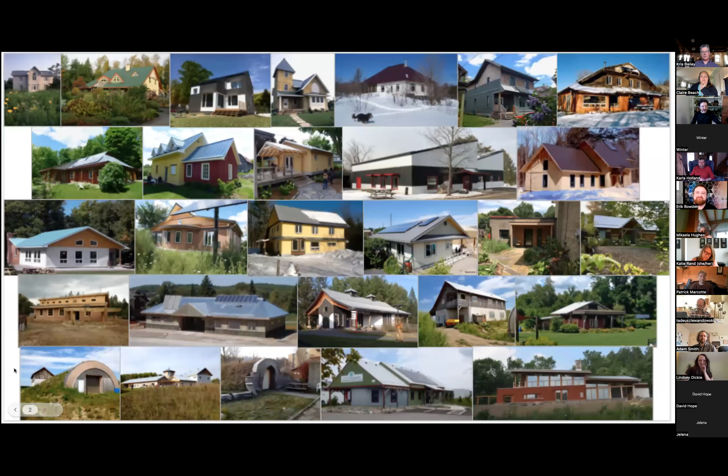So I think probably I can't see everybody's name now that I'm presenting, but I probably know most of you, and you probably know me, and so you probably know that I'm not a software developer by training or inclination, but I have been a sort of design builder in Ontario for quite a long time, 25 odd years. Some of you may recognize some of the buildings here that I've been involved with. Some of you may be sitting in one of them right now, I don't know.

But anyway, over the years, I've had a really great chance to work with so many good people and forge so many great relationships while working on these buildings. And just before I got on tonight, I was moving something around on the bookshelf, and this little beauty kind of slipped out, and I was like, oh, yeah, I've been kicking around the ONBC long enough that there's still an original copy of the information package for building officials lying kind of half under the bookshelf. So

So I guess I'm going to try to lead into the sort of why we're even bothering to make a tool to look at the carbon footprint of building materials. And for me, it comes out of the care that all of us have had for a really wide range of issues around buildings. I think in this movement, different things attract people, and people have sort of different reasons for wanting to think about different ways of building.

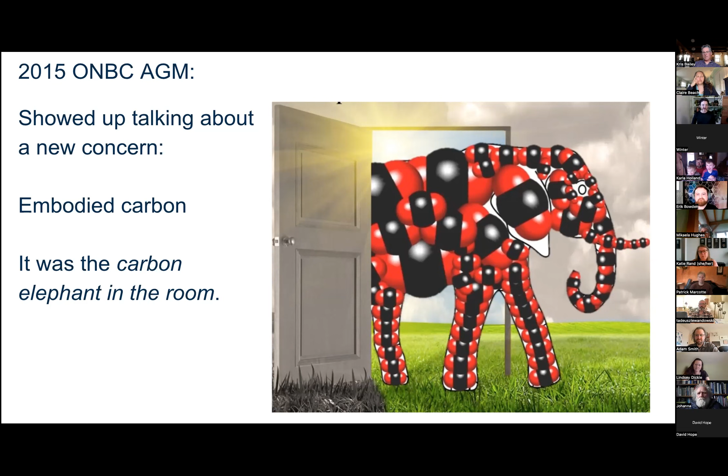And by the time I had compiled all of that at the end of 2014, I showed up at must have been the 2015 ONBC annual general meeting. And I'd had some time to sort of digest some of those embodied carbon numbers I'd found, and to start doing some back of the envelope kind of sketches in terms of what they meant. And it was kind of blowing my mind. I called it at the time the carbon elephant in the room. Some of you might have been there for that presentation with this little elephant character. But that really sort of opened up the rabbit hole that I've kind of been going down ever since.

So at that early presentation, I had done these little sketches of a prototype kind of 1,000 square foot little house, and taking embodied carbon data from the ICE database, from basically anywhere I could find it. If there was a hole, I went searching, and I was just kind of putting whatever results I could find together. And what was becoming sort of really interesting was how different the exact same house could be in terms of its carbon footprint from its materials.

So anything from a building having, like in my first calculations, oh, this one has 10 tons of carbon associated with the materials. This one has almost none. This one bumps up to 13 tons. Hey, look, this one that was made with straw walls actually has sort of net carbon storage.

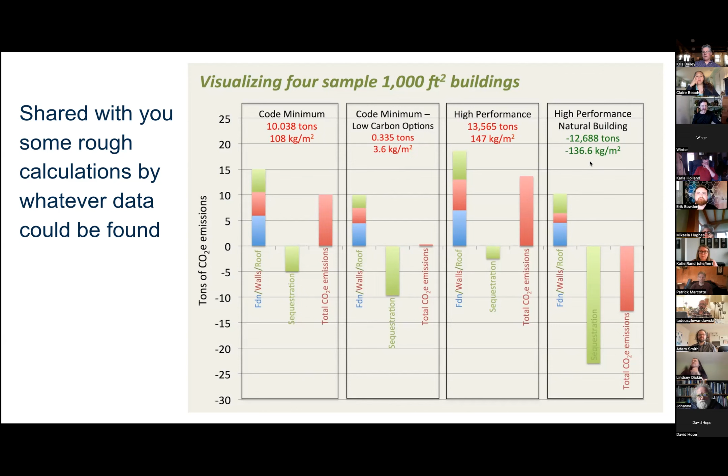I was just kind of a bit blown away by this climate impact that I hadn't sort of seen or been aware of, and amazed that a house, the exact same house plan and built to comparable levels of energy efficiency and stuff, could have this huge difference in its carbon footprint.

And so that seemed very sketchy, back of the envelope-ish, in terms of whether those numbers were for real, whether I was doing that properly or not. It certainly seemed a little incredible that you could have that much carbon footprint from materials for a little building.

So with the great assistance of my colleagues in Endeavour, who sort of gave me the space to go back to school, I went back to Trent and did a master's degree where I kind of looked at all of this in a lot more depth. And through that process, I showed up at the ONBC gatherings a few more times, and finally with some sort of results in hand from that study that I did with my master's.

And it turns out that what had been sketched out in 2015 looked to pretty much be the case in 2019, with a whole lot more rigor. With a lot of really great people in the embodied carbon space kind of looking over my shoulder and helping me out, and really making sure that my methodology was on point. But it turned out that, yep, sure enough, the exact same building.

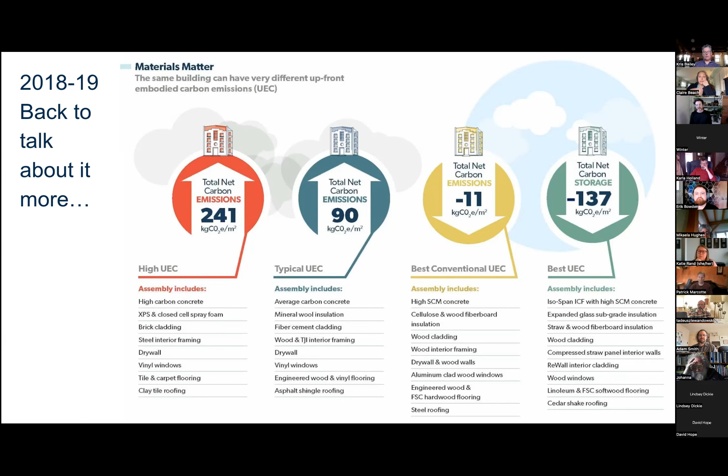And so those results seemed interesting enough and possibly impactful enough that I wanted to take them and publish them out in the world in something that wasn't just a 100-page thesis document that nobody was ever going to read. And so in 2019, the ONBC was by far the most generous sponsor of this white paper that we put out as Builders for Climate Action. There were a number of other sponsors, but that support allowed me to take those thesis results and turn it into a more legible, digestible, and interesting report to talk about all of this in the wider industry.

And one of the things that was included in that report was some extrapolation. The study was all about individual buildings, but what did this look like if we expanded it out to the wider low-rise residential sector? In this case, this is US stats, but essentially, for business as usual type buildings, the materials that make all the low-rise residential buildings in the US appear to contribute about 54 million tons of emissions to the atmosphere every year, which is about 15 coal-fired power plants worth of emissions.

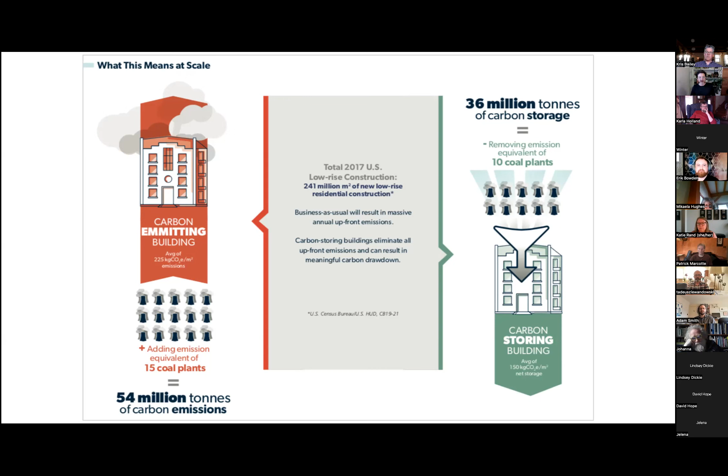And one of the interesting things about being one of the people presenting this solution is that I was able to say, you know, these buildings that we're talking about, these carbon storing buildings, they're not imaginary, they're not theoretical, they're not something that we could R&D for the next 20 years and then figure out how to build them. It's like, this is what me and my colleagues do. There's a whole bunch of these things all over the world, and a whole whack of them right here in Ontario that, even if they were built without this as the intention, stand there as testaments to the fact that this carbon storing building stuff is doable.

So the report did generate a whole bunch of interest. Got asked to do a lot of presentations and speaking gigs and conferences and things like that. It was super interesting to see how, in particular, folks who've been in the energy efficiency field for a really long time, who cared deeply about the climate and hadn't thought about it through the lens of material related emissions, but had only thought about it from operational emissions. The stuff in the reports that compared the impacts of the two definitely popped a lot of people's minds. It made people really think differently, and it shook up quite a few of the conferences that we presented at, and I think in a really good way.

And so that led to some offers and some ability to do some studies for people, and the studies were great because it gave us a chance to look at the results beyond just the kind of model buildings that I had imagined in that first paper. But in order to do these studies at a larger scale, we needed a much better tool to be able to do them with.

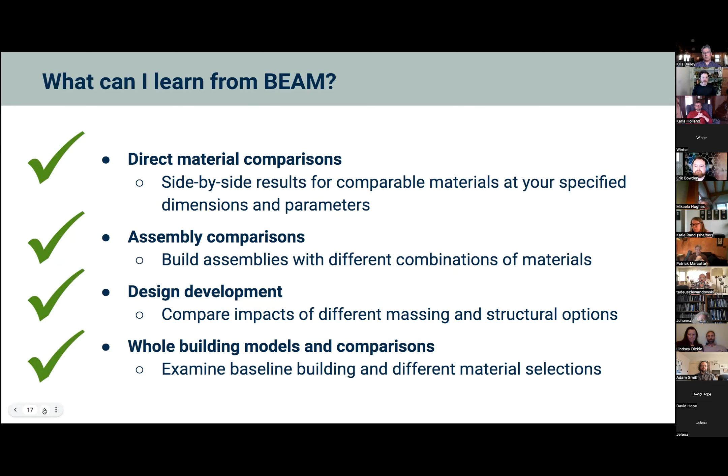And we sort of chose, might not be quite the right word. Those ended up being the materials in BEAM because those were the materials that both had the best representation in the available data, and they also made up the bulk of the materials for a building. So in terms of overall mass, we're representing the majority of the mass of the building. But one of the things that we really want people to be clear about when they use this tool is that their model doesn't include a whole bunch of things as well.

And so we can't really use BEAM to say the carbon footprint of the materials in that building is X, because we're not including things like stairs and millwork and trim and cabinetry. We're not including paints and surface finishes. We're not including any exterior groundworks, driveways, anything like that. We're not including fixtures or mechanical, electrical, or plumbing materials. And there's a pretty good chance for a lot of those materials, the reason they're not in BEAM right now is because there just isn't really good data about them.

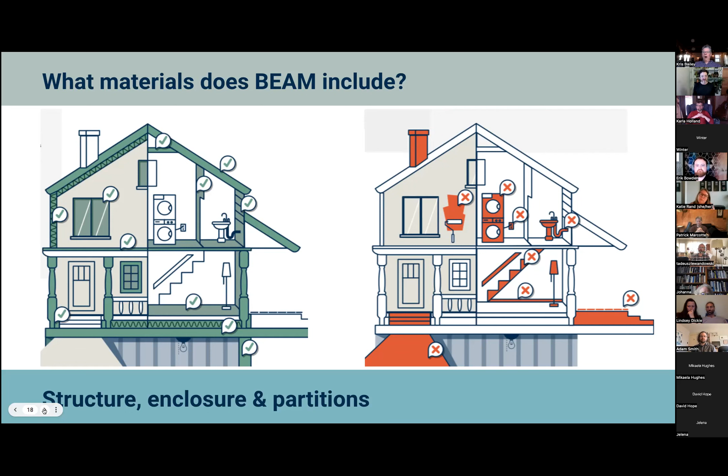And so also, if any of you have dabbled in life cycle assessment or started to look into it, you'll know that there's a whole bunch of phases that are part of the life cycle of building materials. So there's the initial product phase where there's emissions from going out and getting the raw materials and then transporting them to a factory, and then emissions from whatever processes happen during manufacturing. And that's the product phase, or it's called A1 to A3, A1 being raw material supply, A2 being transportation, and A3 being manufacturing.

Then there's the stuff that most of us in this call tonight do, which is the construction part. So A4 is transportation from factory to your job site, and A5 is emissions that happen at the construction site itself. And then we've got obviously the use phase emissions, maintenance and repair, deconstruction and demolition, and waste processing and disposal. Of all of those stages, Beam is really just looking at this first one. It's really just looking at the product phase.

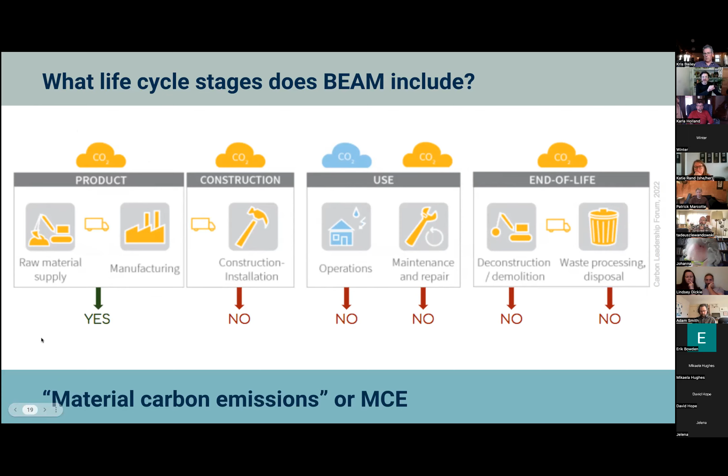We've taken to calling that material carbon emissions, or MCE, because it is all about the materials before they become a building. And it might seem strange that we've limited the scope just to that. But the reason is that if you look at them by overall climate impact, the product phase of making building materials tends to have the lion's share of the emissions that product will be responsible for through its entire life. It depends on the material, but on average, anywhere from 65 to 85% of all the emissions that material will ever be responsible for happen in this product phase.

And then you can see that typically transportation to site and site construction can be anywhere from 5 to 10% of that. Maintenance and repair, another 5 to 10, and end of life 3 to 15. Those are pretty vague numbers. That's averaging all materials. Some materials are more heavily weighted in different areas. Something that needs more maintenance or more frequent replacement might have a bigger chunk there. But this maps pretty reasonably to the majority of materials.

And so, this is the big chunk of the emissions, and this is what we in this community are capable of influencing right now today. And we can make some really big impacts here. And these are the emissions that are going into the atmosphere as we speak. The factories are making the materials that we're all going to put in our buildings this year and next year. So, we concentrate on this. We also concentrated on this because this is the most robust data set.

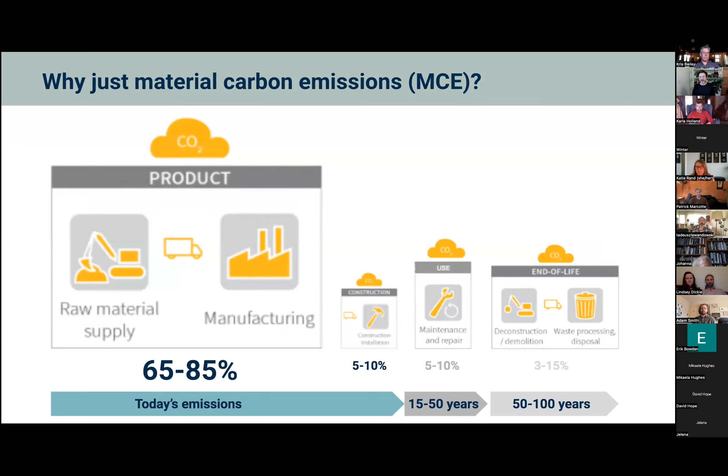So definitely, neither me personally nor the Beam tool is trying to encourage us to not think about getting materials locally, or how often these things need to be replaced, or what happens to them at the end of their life. It's just, if we're going to give builders really actionable numbers, it feels like this is the place to do it. And a lot of what comes later happens later in terms of when the emissions occur, so their importance to our climate is less drastic, and also we're less able to predict them accurately. So we concentrate on these upfront product emissions.

And then Beam is a spreadsheet-based software. It's built out on Google Sheets, and the whole thing begins with you putting in some basic project information so that you can track your projects. We need some assembly and project dimensions from you. And basically, one of the things going on in Beam is these dimensions you give the software are being used to calculate material takeoffs for all the materials in the assemblies that come later.

So, if you're telling us that there's, in this case, 74.3 square meters of foundation wall area, and it's concrete, then later on in the program you tell us that's an 8-inch concrete wall. So then 8 inches times 74.3 square meters gives us a cubic volume of concrete, and that's what we can apply the emissions factor to. So these numbers can be as accurate as you need them to be to build a really great model of a particular house, but they can also be very general.

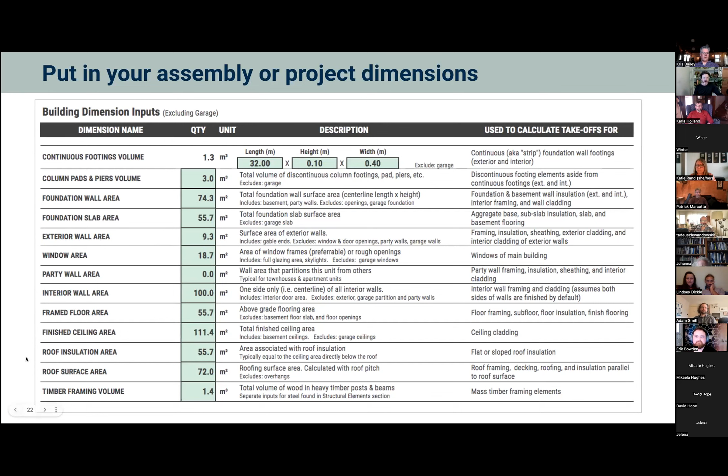I will quite often, if I'm showing people talking about different types of assemblies, just throw 10 square meters or 100 square meters in one of these categories and just use that as a comparative basis. So we tried to keep the number of inputs fairly minimal so that there wasn't a lot of extra work for somebody to have to do to access the information.

And then the guts of BEAM is that there are assembly pages, starting with footings and slabs and moving on up all the assemblies. And so there's all kinds of different categories of material. Everything that you would need to, say, make an exterior wall is here. So you'll find wood framing, metal framing, timber framing, SIP panels, like every kind of material, including things like straw bale and hempcrete and stuff like that, by category.

So right now you're looking at the wall cavity insulation section. You can see we've got some spray foam options, sheep wool, mineral wool loose fill, fiberglass loose fill, and for my 74.3 square meters at, I think I defined here R20, I can start to see the difference between the carbon footprint of all these different materials, and not just between types of materials, but even within material categories. There's a mineral wool batt that's got double the carbon footprint of all the other mineral wool batts.

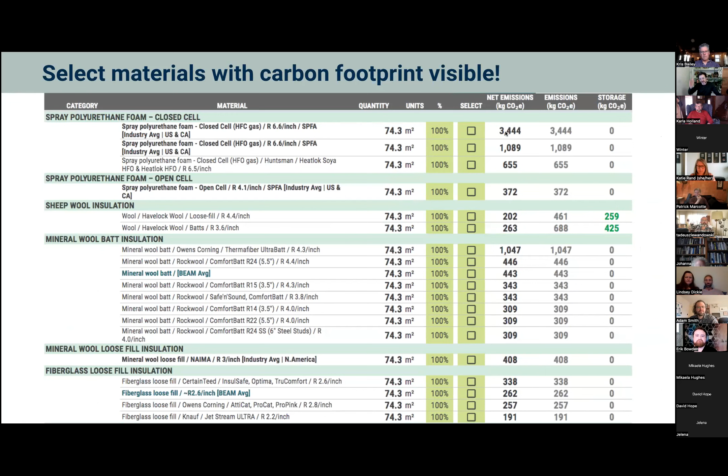So where a category has a lot of competition like that in it, you can not only figure out which material do I want to use, but which manufacturer should I be going to if I want to be procuring something with the lowest carbon footprint. And this is the continuation of that cavity insulation section, and you can see we've arranged them from the highest carbon footprint, going from high to low. As we work our way down, suddenly here we're into the carbon storing insulations like hemp fiber wool, cellulose, wood fiber, hempcrete, straw bale.

And so using BEAM is basically scrolling through the lists of materials for each of the assemblies. When you find what it is you want to use, here I went and clicked on the straw bale EPD from the UK. I click it, the number here goes orange, and that now gets added to that assembly subtotal, and it goes to my building's full total. So for every assembly, every material, you can scan the carbon footprint of these things and build out assemblies to meet whatever kind of carbon footprint you have in mind.

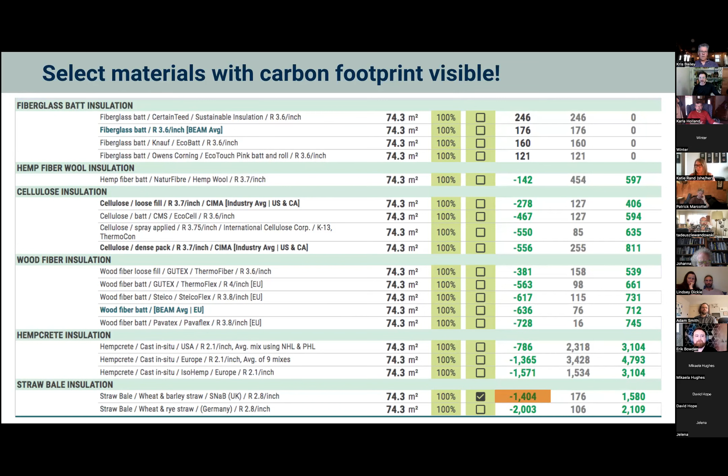And so these are the different assembly pages. Like I said, footings and slab, foundation walls, structural elements, which is for timber framing and post and beam and metal frameworks, exterior walls, party walls for multi-unit buildings, cladding, windows, interior walls, floors, ceilings, roof, and then there's a separate tab for garages. So you basically visit each of those pages as you need them. If you don't have post and beam or you don't have party walls, you don't have to enter anything, but on all the assemblies that are included in your project, you just go through and make your material selections.

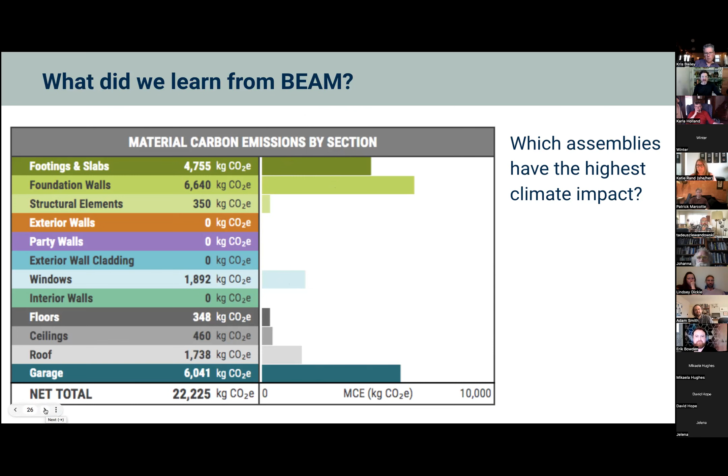It also will give you a couple acronyms here that hopefully you'll get used to if you're working with BEAM. MCE is material carbon emissions, and that's kind of like the total emissions for the building. So that's the total kilograms of carbon dioxide equivalent if you totaled up all the materials you checked in BEAM. And so that's really helpful in terms of that particular project and knowing what its overall carbon footprint is.

MCI is material carbon intensity, and this is taking that net project emissions and dividing it by, in this case, the conditioned floor area of the building, or down here, there's the total floor area of the building. And so that's how it becomes possible to compare between buildings of different sizes. Obviously, if you're designing a 1,000 square foot house and a 10,000 square foot house, there's a pretty good chance that the MCE of the 10,000 square foot house is going to be bigger.

But if you look at it by square meter or square foot, it may be that overall the materials chosen for the bigger house might result in a lower material carbon intensity than the small house. Not necessarily, but that's the reason for giving that MCI, it sort of gives us a metric that we can compare across different building sizes. And then the little scale here just gives you a line as to where your MCI lands, and the scale is kind of based on the studies we've done so far.

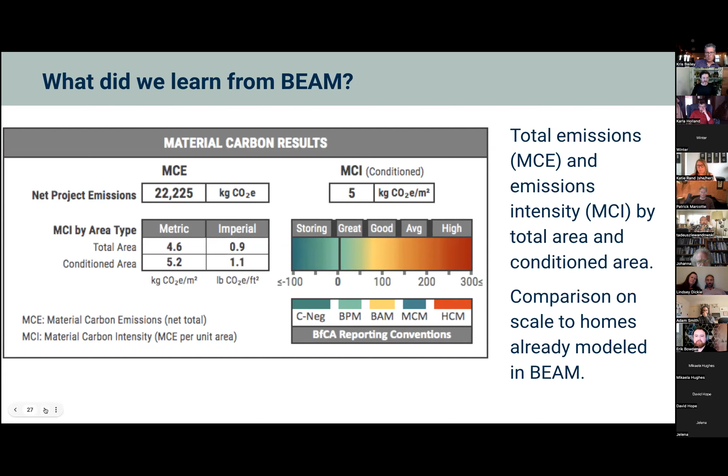You also get this output that rather than just showing you the assemblies with the highest carbon footprint, now it's broken down by specific material. So you saw that the foundation wall had a really high impact in that first graphic. Now you can see that it's the concrete from that foundation wall that's playing the biggest role there. The concrete for the footings and slabs happen to be next. Here we've got the brick on the garage as the next biggest one, and etc.

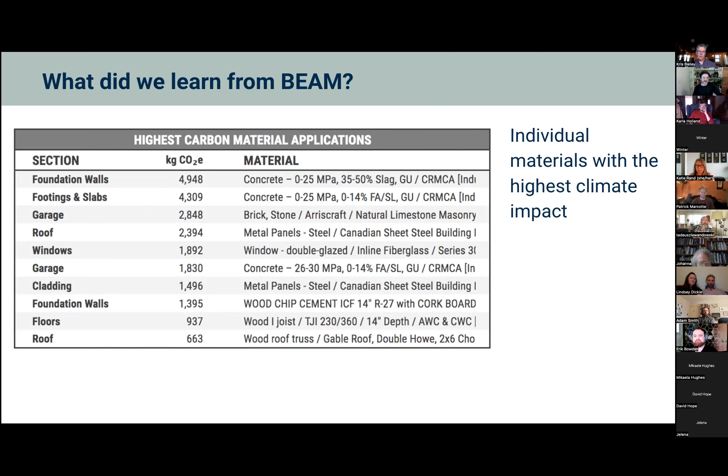It works its way down, so you can kind of pinpoint the materials that are causing you to have the highest carbon footprint. And then just to be fair on the other side, we also try to point out which materials were giving you the lowest carbon footprint. So if you do have any carbon storing materials in your building, they'll show up here, and you can see here that that building had spec'd straw bale walls and cellulose in the roof and bamboo flooring.

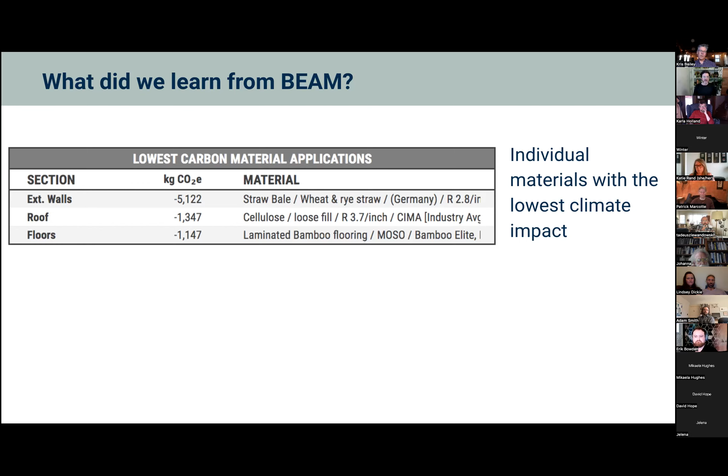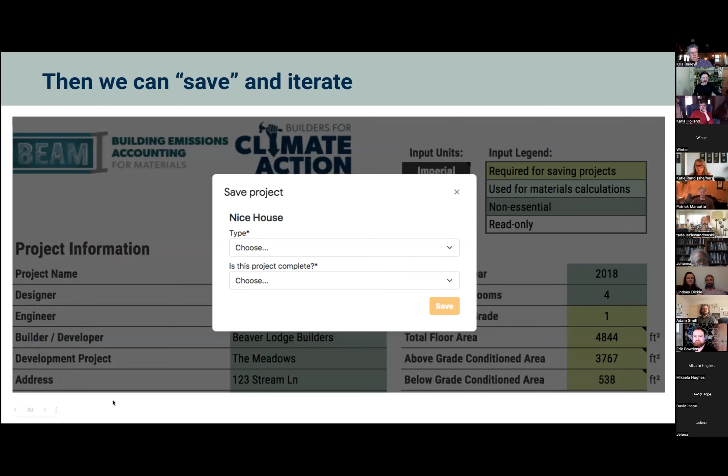And so those kind of offset some of the positive numbers on the way to giving the building a whole total. So you could look here and see which of these materials might I want to use more of, or how can I do more to bring my overall carbon footprint down. And then Beam gives you a chance to save projects and then iterate on them. So the data is stored, and you can go back to certain models, and you can iterate on a model in a bunch of different ways.

And then I think I'm just about through the slides here, but I wanted to show one of the things that happens with Beam and that Beam makes really easy is making that baseline model and then seeing what you can do to make changes to it. So what you're looking at here is a graph of one of the houses that had the highest carbon footprint from the Toronto study. So it had 81,000 tons of emissions associated with it, or 262 kilograms per square meter. So that was a fairly high result.

And so what we did was we took that Beam model and we just started subbing out some of the materials that had been spec'd and made changes. So we changed to a lower carbon concrete mix in the footings, foundation, and slab. We swapped out all the insulation that we could for cellulose. So that was used to replace XPS, fiberglass and mineral wool in this particular model. We used wood fiberboard as the continuous exterior insulation instead of XPS foam, and that made another big impact. We traded out the brick cladding for an engineered wood cladding.

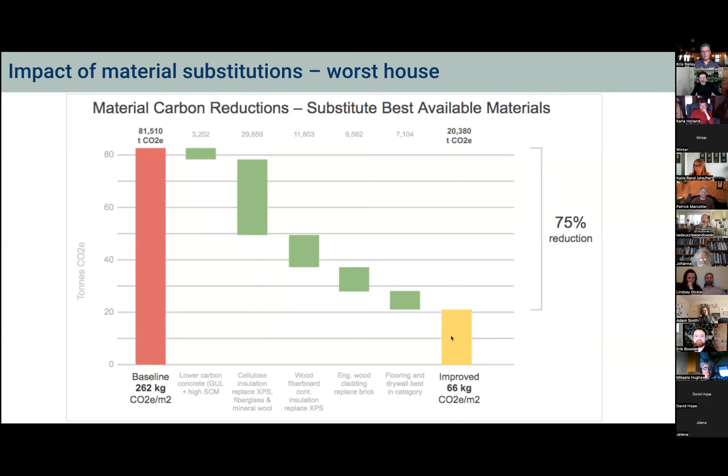So we're really clear on saying this is a planning process. This is something that you don't have to bite off and tackle all at once. You can say, okay, Beam can help me find what the absolute worst offenders in my material palette are and just stop using them right away. Because that's pretty easy to do. Just get off the very worst offenders.

And then maybe you're at that moderate level and then figure out, well, geez, I've never done cellulose walls before, but maybe I'll try that out. Next thing you know, you're in this sort of low to zero carbon mode, and then hopefully we can have more people going down this path at more different paces, and hopefully there will be more than a handful of us natural building nuts doing this thing over here with the carbon storing buildings within a decade or so.

And I think we can really use our buildings to point the way, that it's not a fantasy, that it's something achievable. Even here in Ontario, there's at least 200 or 300 straw bale houses, and if you add the hempcrete houses and straw clay places and other things like that, there's a really good bank of buildings that use some really great carbon storing materials that point the way to a climate solution that's not just a little bit less bad.